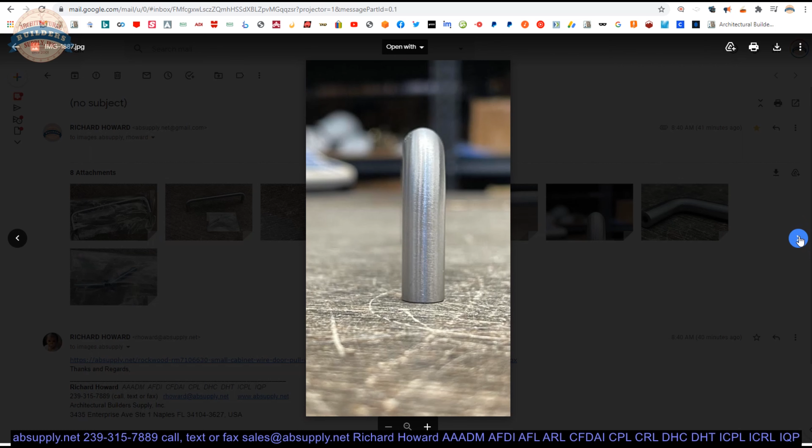You can see the brushed texture to it. A little closer up. The tapped hole for the fasteners, and there are your two fasteners themselves.

Okay, let's look at the extended description. Here is the extended description information that we are looking at: small cabinet wire door pull without base plates.

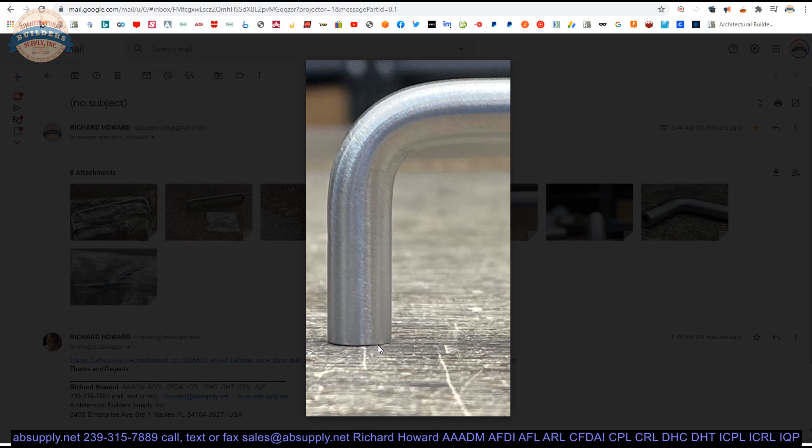Rockwood can make small discs, basically washers, that sit underneath here to change the look. The washer would be about 100 thousandths thick, maybe 1/8 of an inch. If this is 3/8, they'd probably be 5/8 or so in diameter, maybe 3/4 inch. It just changes the look. It's called a washer, that's what it's called.

They're calling them base plates here. The other reason you might consider base plates, not usually on a wire pull but possibly, is if you're installing hardware onto something that can't suffer hardware being tightened down to it. Adding a base plate to the bottom of the wire pull increases the surface area, so you're not crushing the door in.

The dimensional properties and the screws I've mentioned: center to center length up to 18 inches. I don't know that there's a restriction after that, though they might restrict it because the bar will probably flex past that point. But they can add a mid post, or we can increase the diameter as well.

Cabinets, casework, and closets. Now, some documents linked down below—product brochure, let's take a look at that.

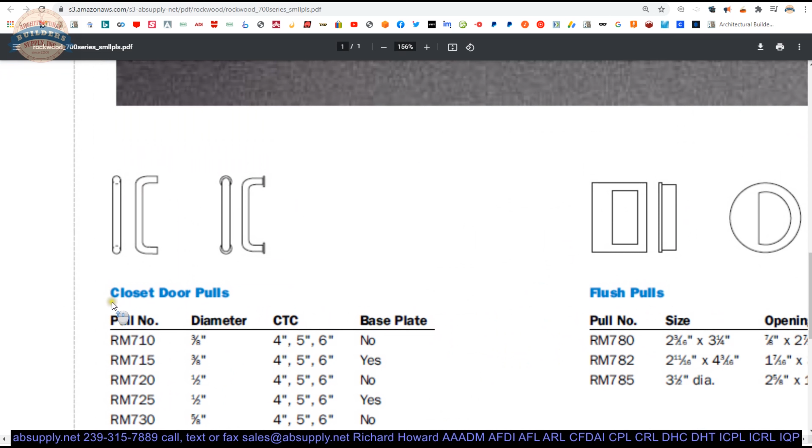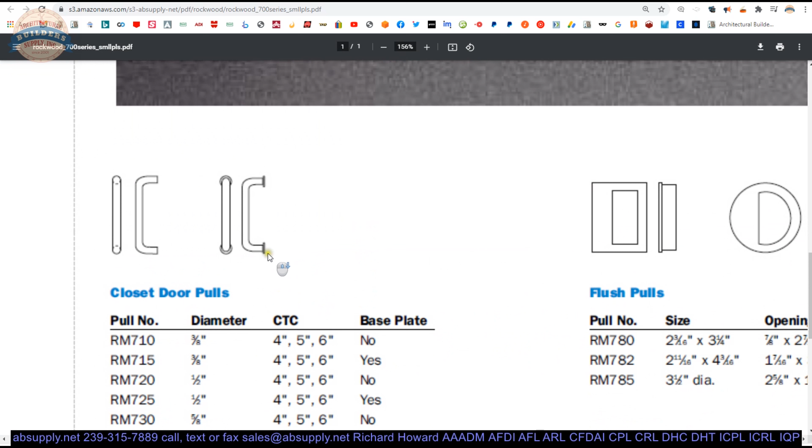This is the RM710, and what's nice about this chart is it shows the different diameters: 720 and 730, 1/2 inch and 5/8 respectively, with and without base plates. You can see a reference to what those washers, discs, or base plates look like there.

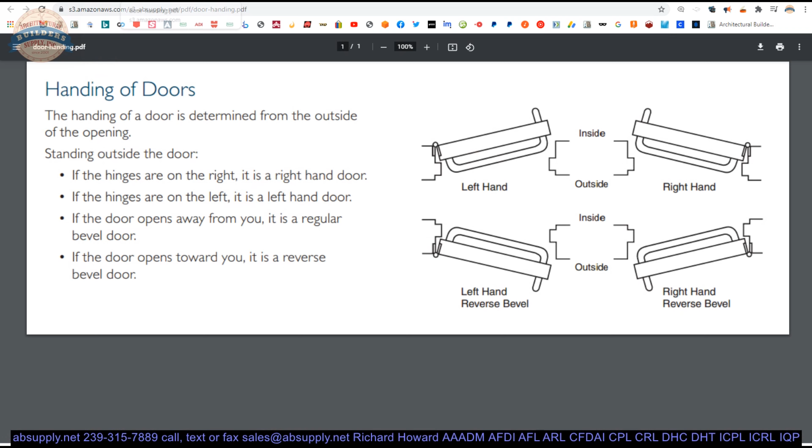Handing chart doesn't apply to this at all—nice to know, but doesn't apply. Printable cut sheet, same documentation, you can see where we're getting our image from, although that does refer to the other finishes.

US 10BE is a powder-coated dark bronze color. It's meant to be compatible with oil rubbed bronze, but being powder-coated makes it a very durable, stable finish—it won't change with time like oil rubbed will. 26D, 626 is satin chrome, 625 polished chrome, 613 oil rubbed bronze, 606 satin brass, 605 polished brass.

Because this material is available in stainless and brass base material, they can do lots of finishes. They can powder coat dark bronze, black, white, and I believe even red powder coating. They can also do polished nickel or antique nickel if you wanted. They've got the base material and most definitely the willingness to entertain custom requests.

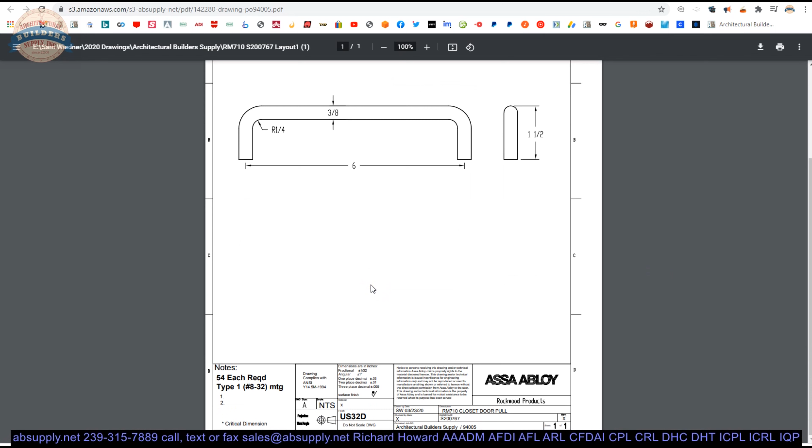Sample technical drawing—this is literally a drawing from a prior order showing the dimensional properties of the item. This sample drawing is from a job we did previously, about March of 2020.

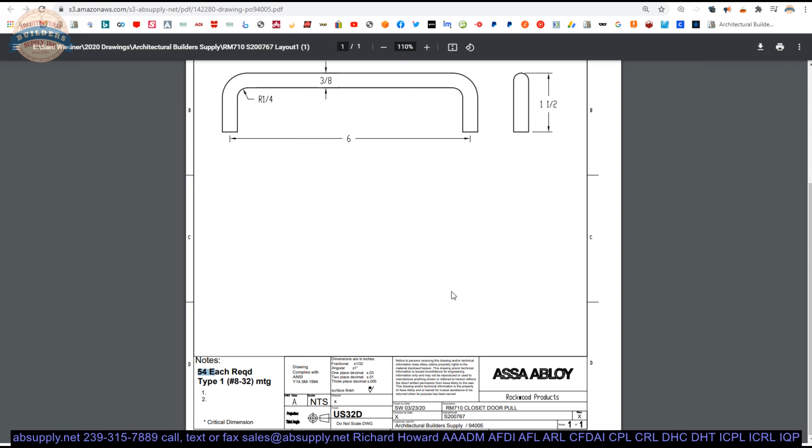Our appreciated client ordered 54 of these. We put that there so you can see what a document would look like—I wouldn't call it an internal document, because it gets sent out to us for approval. We'll sign this and send it back to the factory once we've verified the dimensions meet the description of what the client is asking for.